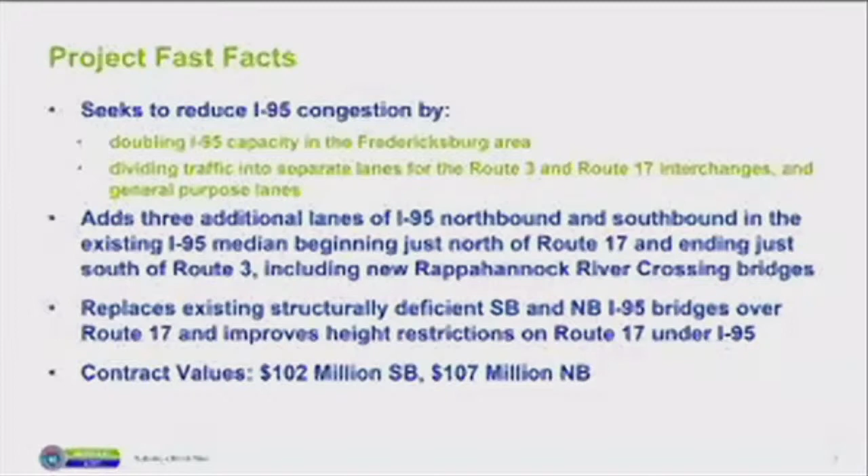the Improved 95 program associated with the Fast Lane grants and the Atlantic Gateway. Additionally, we're going to have some important milestones, including completing the Route 17 interchange and completing the signature bridges over the Rappahannock River. So by fall of this year, you should see the superstructure in place on the southbound I-95 Rappahannock Bridge. And right now, we're already beginning substructure construction by flipping our causeway and beginning some of the other work to work on the northbound bridge.

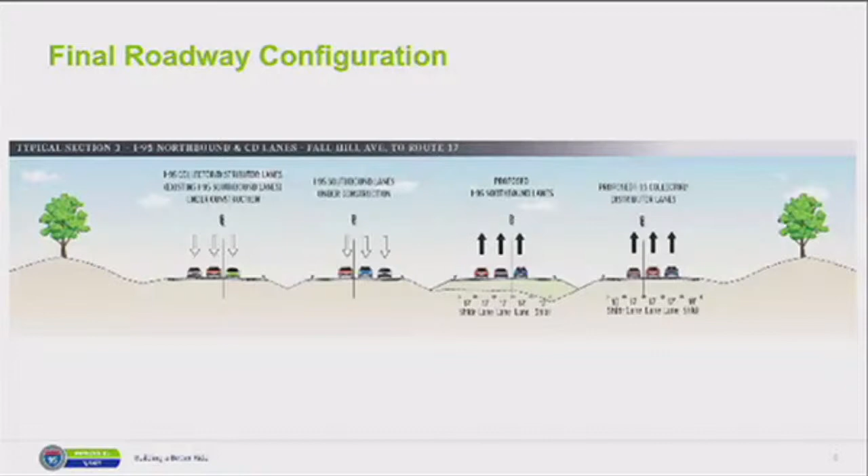Here you can see our final roadway configuration. You'll notice that we're building essentially 6 new lanes, 3 in each direction, in the median of existing 95 between 130 and 133. This presents some very unique constructability challenges that really come home when we get down to the Rappahannock River and have to build these 2 bridges to carry those lanes in the median. Here you can see the existing bridges that were built with the original I-95 and subsequently widened, carrying the existing GP lane traffic. These will become the future CD lane bridges when the through lanes open in the median.

The existing southbound bridge is a 10-span structure, about 1,298 feet long. The northbound bridge is 8 spans and about 1,083 feet long. The concrete substructure units are reinforced concrete, and the superstructure are simple span painted structural steel plate girders.

When we started looking at the proposed bridges within the median, the first thing we did was set the interior span lengths, keeping 3 things in mind: avoiding the historic resources on the south side, the Rappahannock Canal and lock system, maintaining the channel in the river on the north side, and minimizing the number of piers. So what we decided to do was set our new Pier 1 right in line with existing southbound Pier 1, then skip every other pier, resulting in 270-foot span lengths, for a total bridge, a 5-span structure, 1,200 feet long.

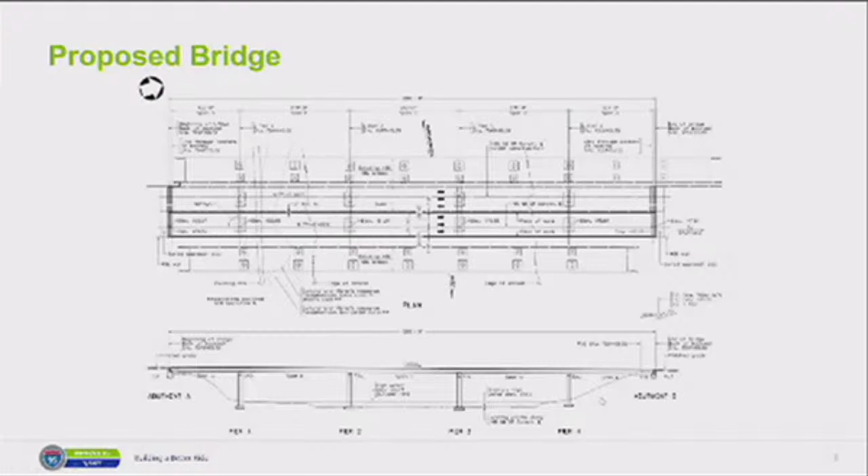As Robert mentioned, the transverse section accommodates 3 new 12-foot travel lanes and 12-foot shoulders. We're using 42-inch high concrete parapets, meeting the test level 5 criteria. Based on the span lengths, continuous structural steel plate girders were the chosen superstructure alternate, and we maximized the girder spacing out at 11 foot 4 inches.

During preliminary design, we evaluated hybrid girders using 70 KSI steel in the flanges, and we also evaluated haunched girders. But working with Wagman and the fabricator, neither of those options were as economical as what we ended up with: a conventional grade 50 weathering steel system.

One of the big hurdles we had to overcome was the development of a proprietary temporary bridge system that we could rapidly remove and reset. It could handle the loads of a 400-ton crane and had a low enough profile to allow the maximum amount of water underneath of our 50-foot openings. A key here is we had to remove bridge number 3 during the peak recreational season for the river.

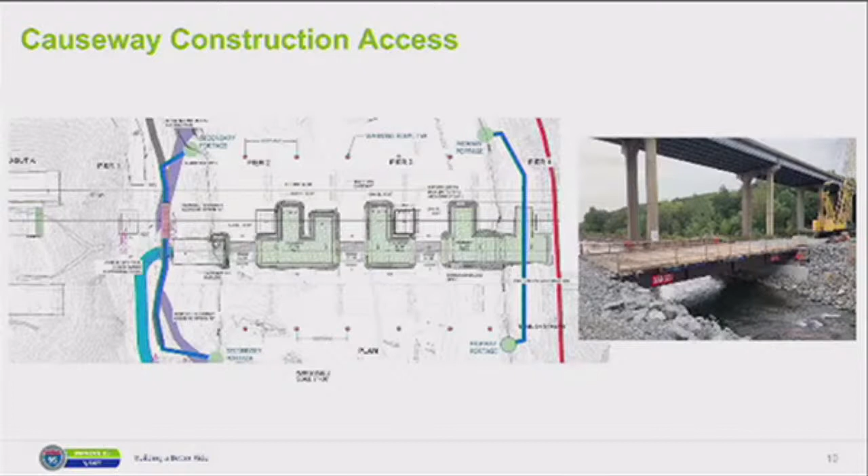One of the key aspects of this job was working in and around the pedestrians and river users. We worked with several groups, including the Friends of the Rappahannock and the Fredericksburg Trail Alliance, to maintain access to the river and the trails on either side during construction. Bridge 3 was taken out of place during peak river season so users had free access, and when Bridge 3 was in place, we installed temporary portages for river users to avoid the dangers of going under that bridge.

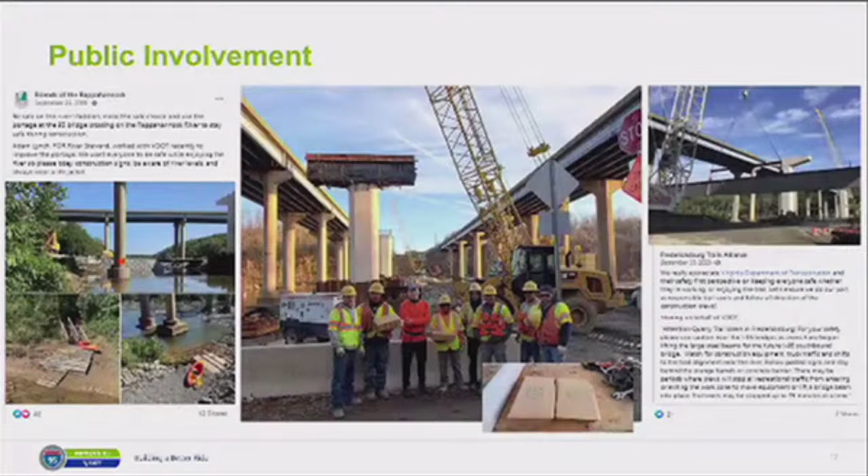Abutment B on the north side is also a Virginia alternate abutment, but it's founded on steel H-piles. Rock in that area varied fairly significantly, and using steel H-piles in pre-drilled holes was the best solution. That abutment is located close to the last pier on the northern end of the existing southbound bridge, and because of that it's a little bit higher than abutment A, making MSE walls for the abutment and wing walls a very economical solution there.

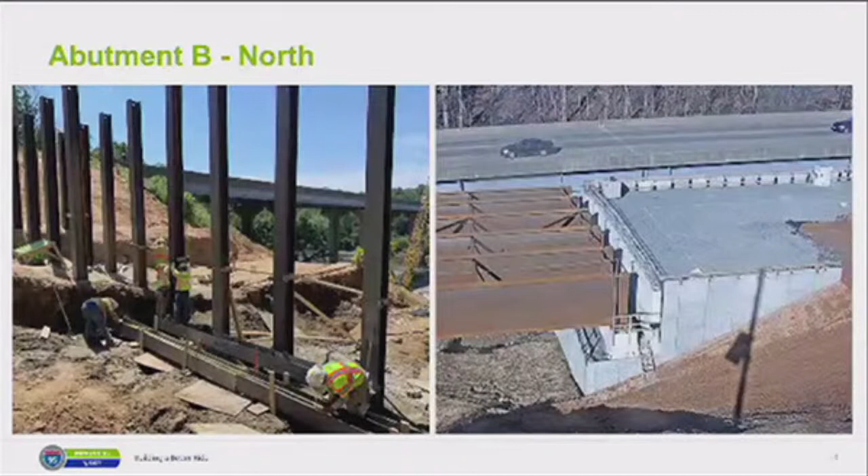The piers have hammerhead caps and columns with rounded ends. The pier height from the top of the cap to the bottom of the footing for the river piers is approximately 92 feet, or a little over 9 stories. All piers are founded on rock, either granite or gneiss.

You could say that rock looks real nice, Tripp.

One challenge during project pursuit was determining how we could get into the river to obtain borings for those river piers, doing it within time-of-year restrictions established by environmental agencies, getting an environmental permit to do that work, and doing it within the scope validation period identified in the RFP documents. We did have existing information from the as-built plans and limited borings that VDOT provided us.

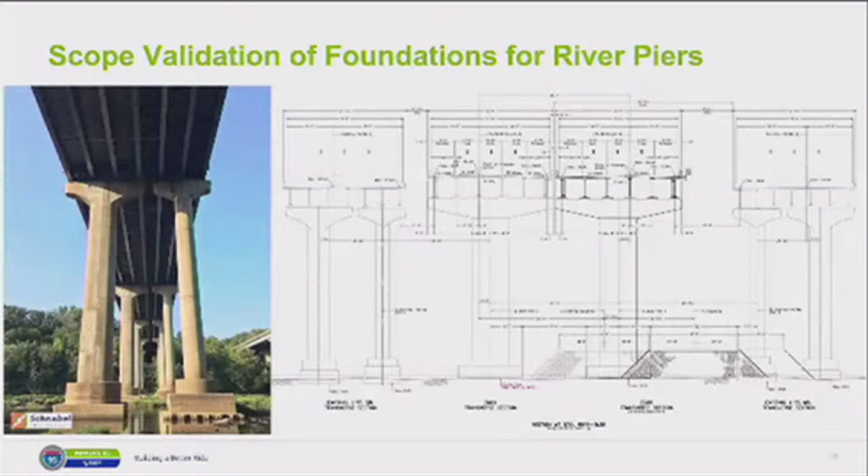So here you can see some pictures to emphasize the importance of this overall waiver of the scope validation, and the potential gains to the project delivery schedule and potential reductions in the price proposal from not having to do these preliminary river borings.

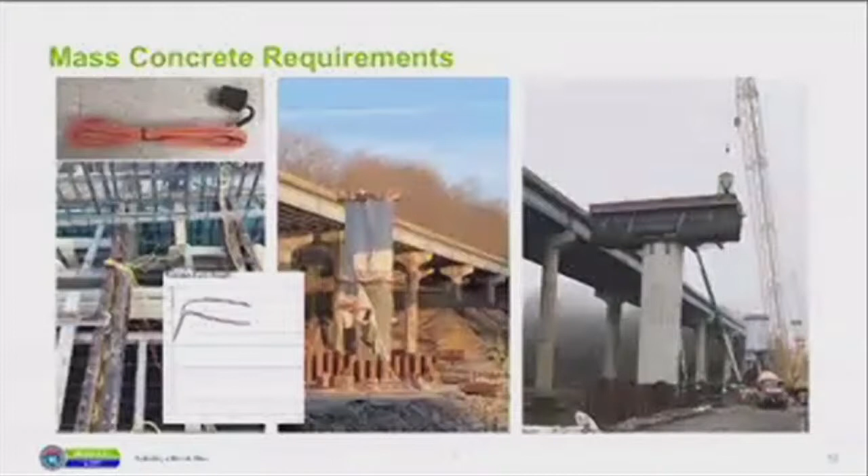During our proprietary meetings with VDOT, as Jerry said, we did a lot of legwork to determine that it was feasible to inspect these bridges down the road. We found a local provider of that inspection equipment, and the snooper that we identified had no challenges reaching under that bridge, both for the southbound and the northbound. And one thing that type of equipment did was allow those inspections to occur from the right-hand shoulder, providing a much safer inspection procedure in the future.

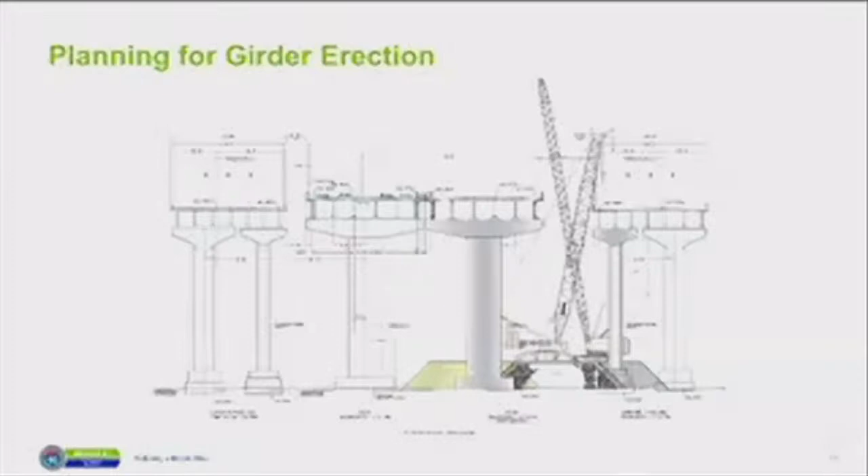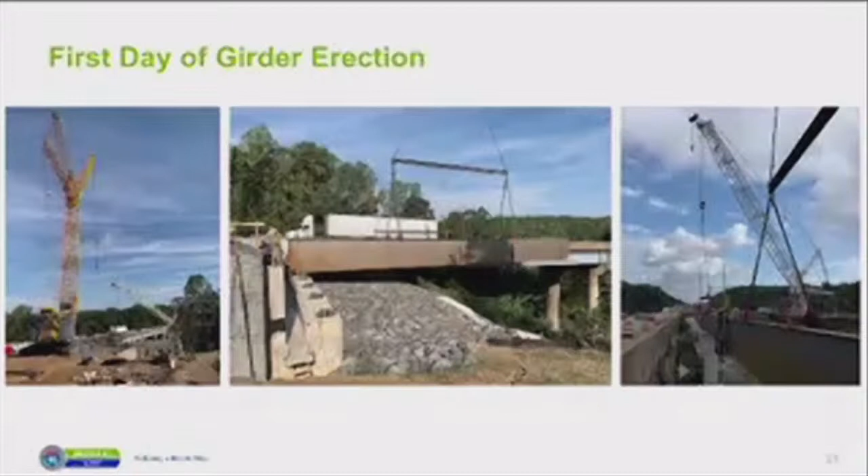So we've done the planning as Jerry described, the design process both from the engineer and the erector. We've built the access causeway, and we've got our cranes on site to help us do the erection. But when it comes down to it, it's the individual iron workers who perform the erection.

Looking at the left-hand photo, you'll see the iron workers in their cage waiting on the girder as it comes from the right from the crane. Then that iron worker in the middle picture grabbing that piece of girder with the spud wrench, and that's what really puts it all together. And then on the right, they've pulled it home and started to put the splice bolts in to complete that segment erection.

The girder erection progressed about 1 span each week, but a couple things occurred during erection. One, we did revise our erection plan to incorporate lessons learned and to make sure we had the safest operation as we did that work.

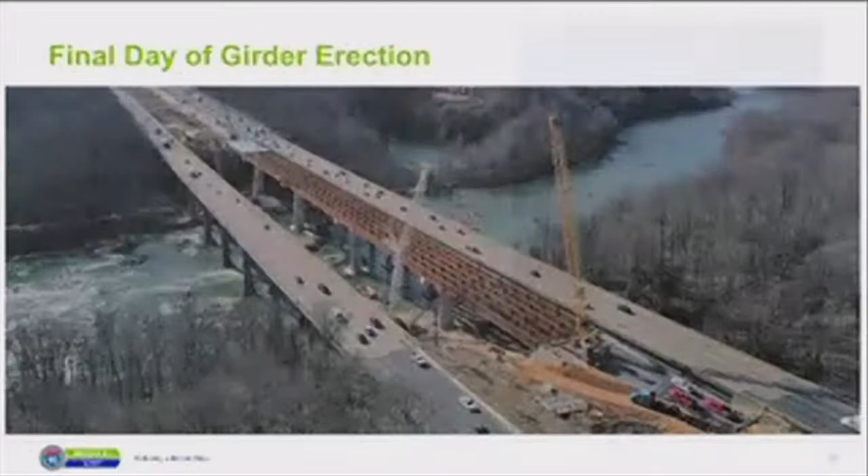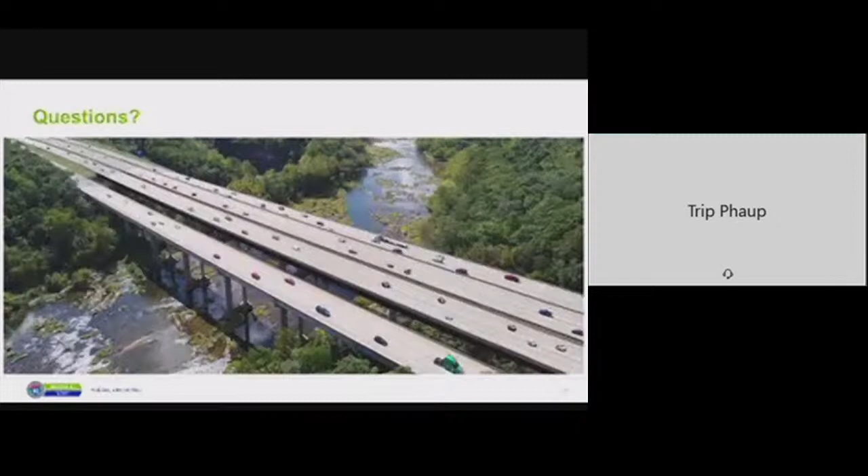Yeah, this is Trip, and I'll respond a little bit more to Junyi's question about the issues with the abutment. There were no real issues with the design of the abutment. It went pretty smoothly following VDOT standard detailing practices.

Really, the challenges related to the varying geology at each abutment. At one abutment we had really good rock, so setting on a spread footing was very reasonable. At abutment B, the geology was a little different, with the rock dipping away, kind of transverse to the bridge, so short piles on one end, longer ones at the other.

Making sure we had that abutment footing set where we wanted was a challenge. The other challenge was that construction of the southbound bridge occurred first, and we weren't sure if we'd win the northbound project, so it was detailed as a standalone abutment. But when we won northbound, we quickly had to figure out how to retrofit the southbound abutment so the northbound abutment could tie right into it. We did think about it during southbound design, but putting it in place was a bit of a challenge. Everything seemed to work out pretty good.

I think the reason they have to be tied together is that, as we're still kind of dealing with, there are significant drainage concerns regarding maintenance access for the trough in the abutment, because this bridge is large enough that the trough could facilitate critters and other things getting in there. We've had a lot of discussions about how to prevent that and keep it accessible for maintenance purposes, keeping that trough clear. On top of that, a lot of detailing and coordination between the structural and roadway teams to work out the drainage scenario around that abutment, because we're sitting on that hard slope of the Rappahannock River Gorge, so you have very limited paths for that drainage. You're not looking at sheet flows over there for sure.

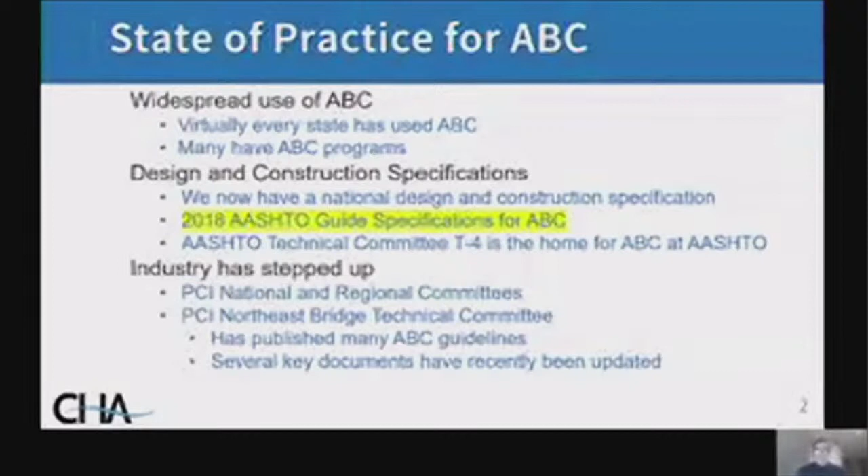Industry has stepped up. Many industries, the steel industry and the precast industry, have stepped up. PCI National, and I'll be speaking quite a bit today about the PCI Northeast Bridge Tech Committee, which is a committee comprised primarily of DOTs, 7 DOTs in the Northeast, plus producers and some consultants. I've been a member of this committee for 30 years, and we've published many ABC guidelines that are available for free download.

Here's a listing of some of those guidelines, both national and the Northeast documents. The Northeast documents can be downloaded at www.pcine.org. As you can see, there's a whole bunch of guidelines here that are all applicable to ABC, and they're very useful documents.

Federal Highway also has 3 very good documents on their site. You can search FHWA ABC, and you'll find their site where you can download these documents for free. The first bulleted item here is a general ABC, basically ABC cover to cover manual. The second document is really a design manual, engineering, design, and fabrication and erection of PBES. And the last one is construction and contracting of ABC, which is useful for managing a construction project.

Other great references that are available, NCHRP Project 12-98 developed 2 guidelines with respect to ABC. The first is a guideline on tolerances, where we specify recommendations for specifications for tolerances for elements, tolerances for erection of elements, and most importantly, tolerances for joints between elements, which is used to accommodate tolerances. If you want a job to come out correctly, this is an important guide to follow.

Also, guidelines for dynamic effects of bridge systems. We have found that moving bridges on SPMTs causes significant dynamic effects on the false work, the SPMTs, and even the bridge. So research was done to develop design guidelines for dynamics. Both of these documents are referenced in the guide specifications, so they're worth downloading. They are available for free.

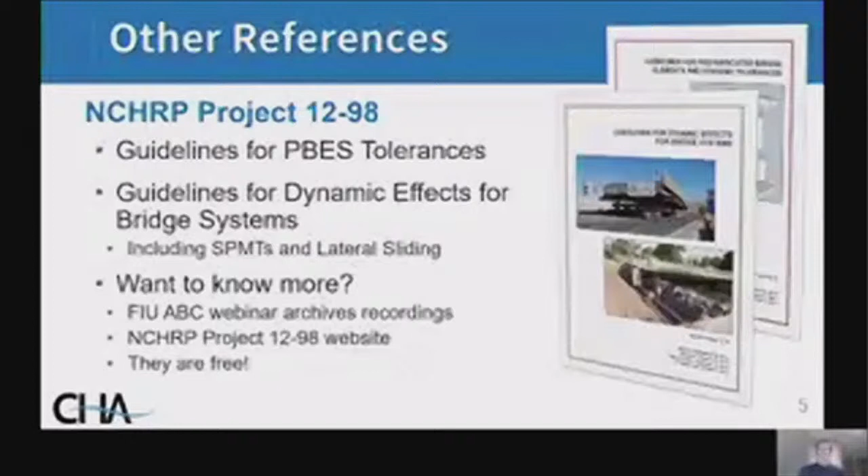You can search NCHRP Project 12-98 website. You can download the documents. You can also download the report that led to those documents. If you want more information, you could actually go to FIU ABC UTC website, and there are webinar archives for 2 presentations that were given on both of these documents. Again, they are all free for download.

So let's dive into the guide spec and see what it contains. The first 5 sections of the guide spec are design provisions. I'll talk a little bit of more detail in the next few slides. The last 7 sections are construction specifications. Due to the brevity of today's presentation, I can't get too deep into those, but they are available, and they are full AASHTO format construction specifications for all these items.

Let's dive a little deeper into the first 5 sections. Section 1 is an introductory section. It includes definitions, and you might think that's boring, but it's important that we have common terminology that we use. For instance, the gap between elements, we refer to those as joints, closure joints. Sometimes people refer to them as closure pours because we're pouring concrete or UHPC into the joint, but AASHTO has made a decision to use the term closure joints. That's just an example of some of the definitions that we have.

Section 2 has general design provisions outlining responsibilities for the contractor and the engineer. Shipping and handling provisions are listed, which is important to know, as it's commonly misunderstood that shipping and handling lifting calculations are the responsibility of the fabricator, not the engineer. This is contractor means and methods. But we do have provisions that you can specify for the contractor or the fabricator to follow.

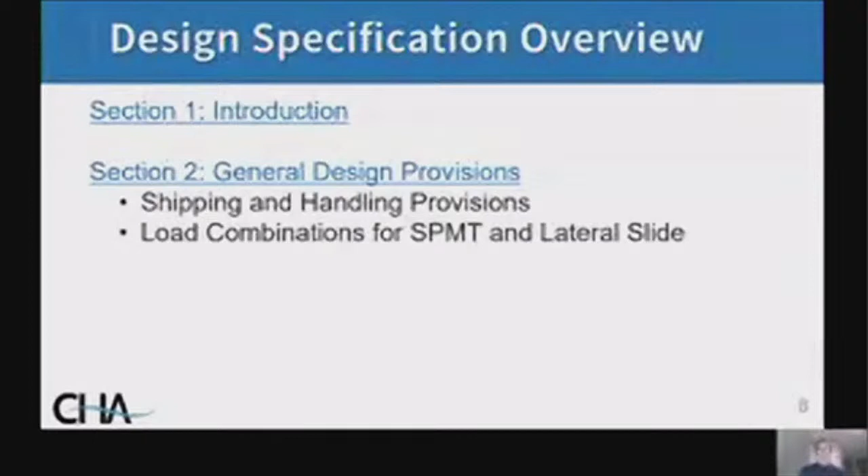We have load combinations for design of prefabricated elements, but also load combinations have been developed for SPMT and lateral slide bridge moves. This includes dynamics that I mentioned before.

Section 3 is the major design section in the document. The key thing is the majority of the specifications are based on emulation, meaning we're emulating cast-in-place construction with precast. The key about emulative design is that if you use emulation, your design of the structure as a whole can be based on cast-in-place construction. So analyzing a pier, analyzing abutments, walls, all that can be done using standard AASHTO provisions. There are significant seismic provisions in this section.

There are also several provisions not covered in the AASHTO LRFD bridge design specs. For example, the bridge design specs include provisions for development of hooked bars, but there are no provisions for lapping of hooked bars, which is a common ABC detail. The guide spec contains those provisions.

UHPC is very popular. We have provisions for design and construction specs for that. Mechanical connectors - the current AASHTO bridge design specification has mechanical connectors for reinforcing. The basis of that is the connector needs to develop 125% of the specified yield strength of the bar. ACI has a second level, type 2 mechanical connectors, which can develop 100% of the specified tensile strength, which is a higher level. For a grade 60 bar, that's 150% of FY. So we do recommend using mechanical connectors type 2 for critical connections.

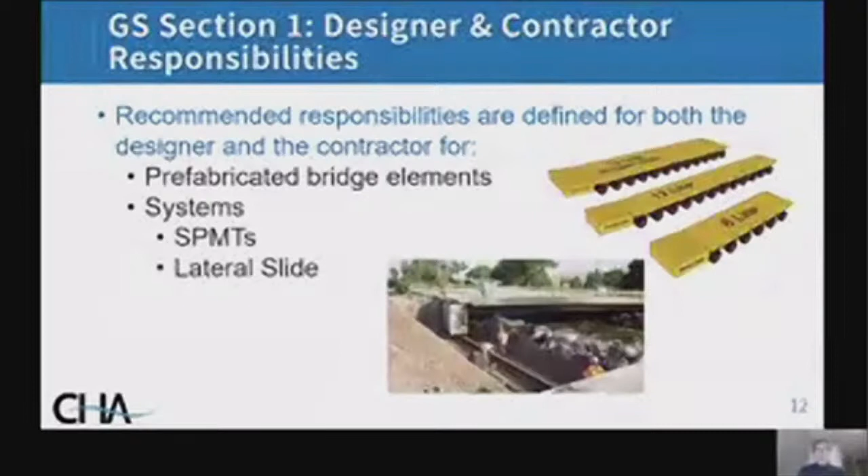Load combinations are included in Guide Spec Section 2. This is simply stating that if you're using an emulative design process, you essentially design the structure according to the AASHTO LRFD bridge design specifications.

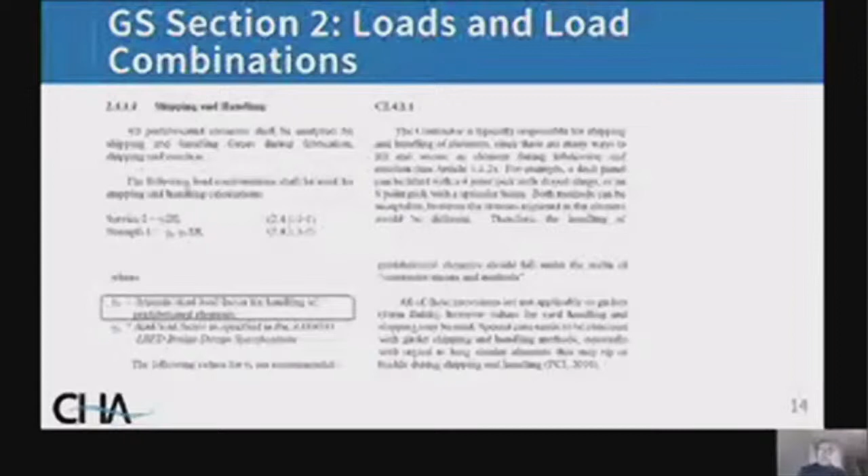As I mentioned, we have provisions for shipping and handling. We recommend that engineers specify these provisions for the contractor to follow. These are based on work done at PCI. Essentially, we use dynamic load modifiers to increase the dead load to account for dynamics. This table shows the modifiers that are used in the PCI documents.

Essentially, things that engineers typically don't think about - there's significant force effects when you remove a precast piece from the form due to form suction and adherence of the piece to the form. This is often the controlling load case when checking an element for lifting and handling, because at this time, typically the concrete strength is not at its full strength, it's at its initial strength.

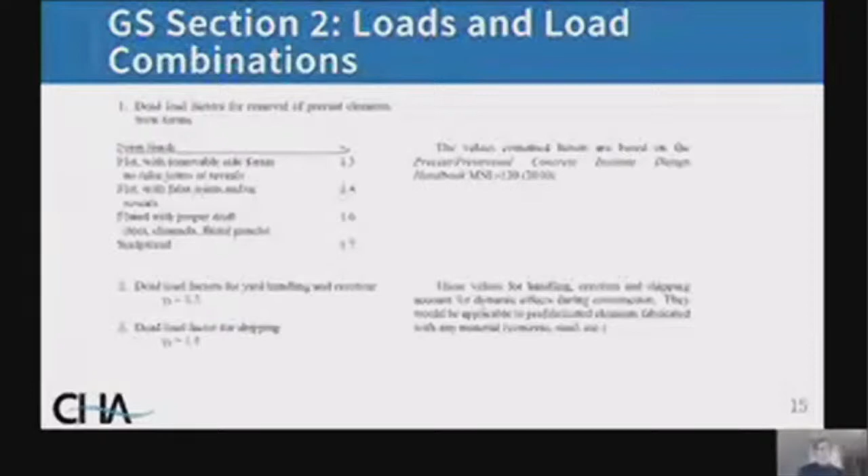Again, this is the realm of the contractor's means and methods, but we want the engineers to know the correct process to follow for this. The PCI MNL 120 document is listed on the right in the commentary. That document does include examples for how to calculate lifting and handling calculations. We recommend that designers specify that document as a requirement.

Section 3 is the largest section in the guide spec at 85 pages. It includes all the design provisions, including seismic provisions, which we're not going to cover in much detail today. We just don't have time to cover all the provisions, but we'll breeze over a few of them just to give you a flavor for what's in the spec.

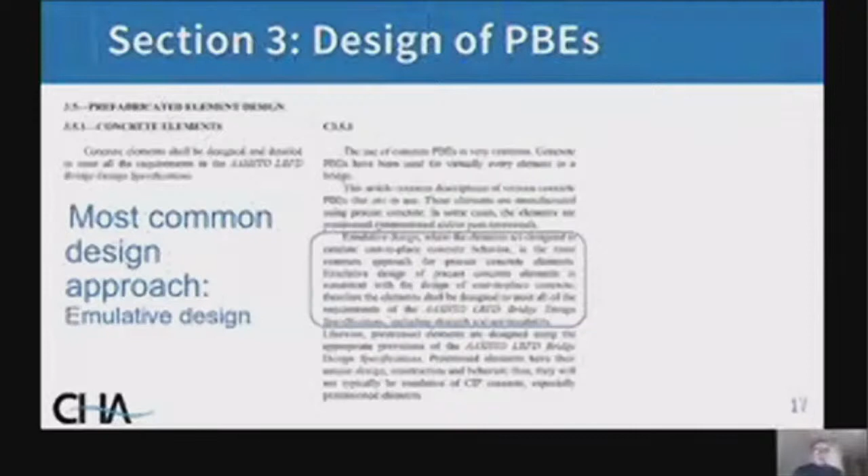As far as design of PBEs, Section 3 covers the design, and this is where we say that you need to design according to the AASHTO LRFD bridge design specifications and use an emulative design approach.

As far as connections go, they're very important in prefabricated and precast elements. The most common connections are covered, the ones that we see across the country. The term we use for these closure joints is cast-in-place closure joints using lapped bar reinforcement.

This covers straight bars, lapped headed bars, lapped hooked bars, and lap bars with UHPC. These are all covered in the spec. We also cover mechanical connectors, the Type 1 and Type 2 connectors mentioned before. Bars inserted in grouted post-tensioning ducts are a version of a mechanical connector. We also cover pocket connections and socket connections.

There's some confusion in the market about what a pocket connection is versus a socket. The best way to describe it is shown on the next slide with nice graphics. A pocket connection, shown on the left, is where reinforcing from one element is passed into a void in the second element that is filled with a material, usually concrete.

A socket connection is where a portion of an element is inserted within the adjacent element. There are two details shown on the right. The top one is a column set into a footing that's cast in place - that's a socket connection. The bottom detail is a column inserted into a void in, say, a pier cap, which is also a socket connection. The best way to remember a socket connection is to think of a light bulb that you screw into a light socket - that's the best analogy I have. If you understand that, then everything else is a pocket connection.

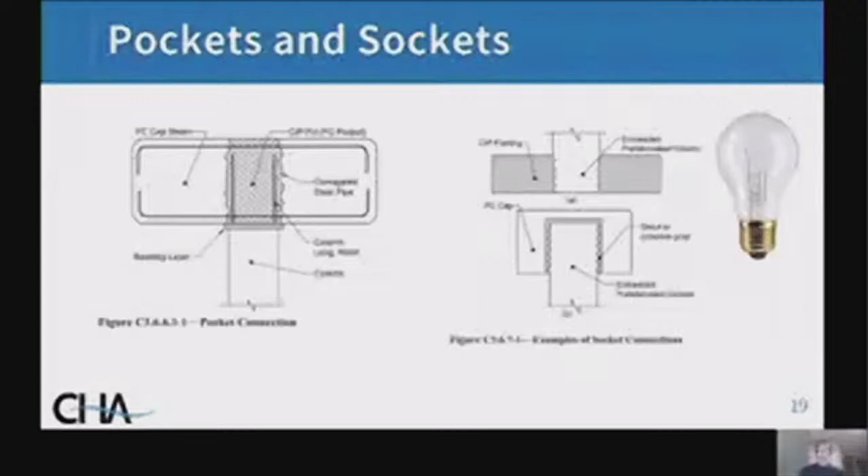Let's show some of my favorite pocket connections. This is an integral abutment detail where we use corrugated metal pipes cast into precast pieces, set over piles, and the void is then filled with concrete to complete the connection. Very simple detail, very simple connection, easy to execute in the field. The key thing is what is the resistance of that pile for punching through the void, so we've developed an equation for the punching shear based on AASHTO provisions for interface shear.

Section 3 covers grouted couplers. I mentioned this before - the grouted couplers essentially are a mechanical device made of cast steel that transfers force from one bar to the next.

In the diagram on the right, the couplers can be located at the base of a column, inverted at the top of the footing, or inside the cap as well. You can connect walls, piers, anything with these couplers. The photo in the center shows a pier cap being installed in Utah, where you can see the projecting bars from the column and the couplers cast into the cap.

The way we transfer force to these couplers: the lower bar force is transferred via the grout inside the coupler, which is put in after the connection is made. It transfers the force from the bar to the coupler, then the force is transferred from the coupler through the grout to the upper bar, completing the connection.

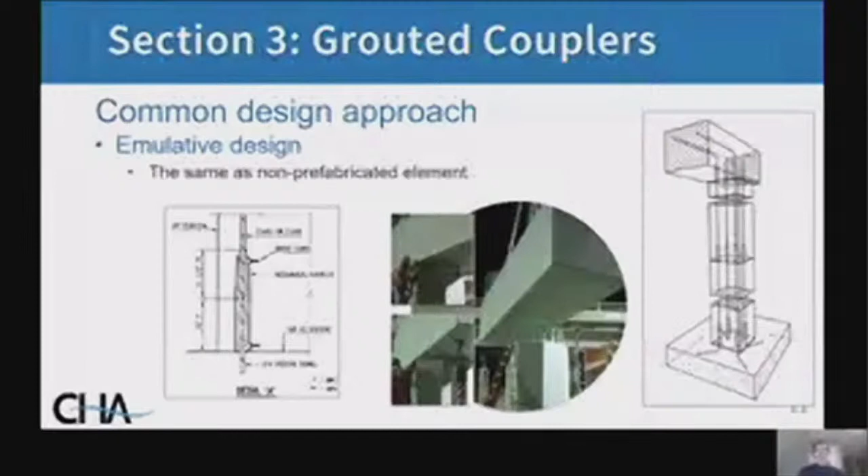Some people are uncomfortable with these connectors, worried about how they'll function. The reality is they're built on the same concept as the lap splice in concrete, where force transfers from one bar to the next via the concrete around the bars. So if you can trust a lap splice to function, you can also trust these couplers to function as well.

Another detail that came out of the PCI Northeast group, one of my favorites, tries to simplify construction of an abutment by using standard wall panels for the lower portion. We recommend using corrugated pipe voids in that piece to reduce the weight of the piece and to use it for connections. That void is filled with concrete in the field.

The key to this detail is having one complex piece - it may be two pieces - on top of the abutment that has things like the steps for beam seats, plus a whole bunch of simple pieces. That's the idea.

The connection is made by putting dowels inside the voids that pass between the wall stem and the cap, and filling that with concrete. Very simple, easy to design, because this joint being just below the beam seat essentially is a low moment demand connection. If you think about it, bridges built with stone masonry abutments have just mortar between the stones, and with a gravity section there's virtually no force going across the joint. So it's a very easy connection to design.

Here's a photo of a bridge built in Kittery, Maine, where the Maine DOT took these details and executed them very well. You can see where they got creative. The footing is shown on the right with dowel bars coming out of the footing in clusters. Those bars line up with the voids in the panel.

The panel is set over the bars. The voids are filled with concrete up to about three-quarters of the height of the wall panel. Then they come back a day later and put dowel bars in the upper portion of the panel, as you can see in the center photo. Then the caps are placed on top and filled with concrete to complete the abutment. Very simple construction, very fast construction. You can see the aesthetics of the abutment is beautiful.

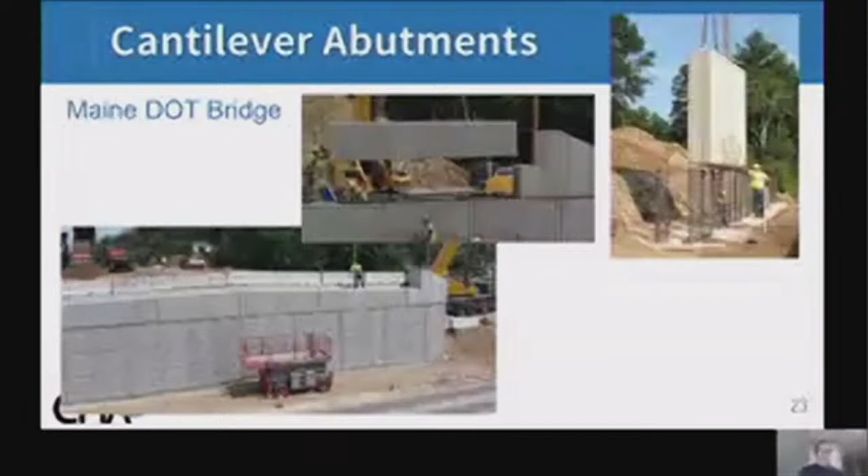Very nice bridge. Another detail I like was developed in Washington State, where essentially they built the bridge upside down. They constructed the column or wall panel before they put the footing in. This is great for pile-supported foundations, and the idea is to have a precast column with temporary support on it, then set that down, a rebar cage is set around that, and you pour the footing. Even though it's cast-in-place construction, it's very fast - probably 2 or 3 days to build a pier.

Taking it to the next level, Washington State studied this detail with a research project funded by Federal Highway, coming up with the idea of having the column set into the cast-in-place footing, but with no reinforcing bars passing between the column and the footing. This is a true socket connection.

The best analogy to this connection is a mortise and tenon joint in woodworking, where one wood piece is inserted into a void in the other piece, giving you a very strong and durable connection. The nice thing is you can tie the rebar cage ahead of time and then set the column in. They're showing the column being installed on the right with the bottom mat of reinforcing in place, but the reality is you could have both mats of reinforcing in place before the column is set.

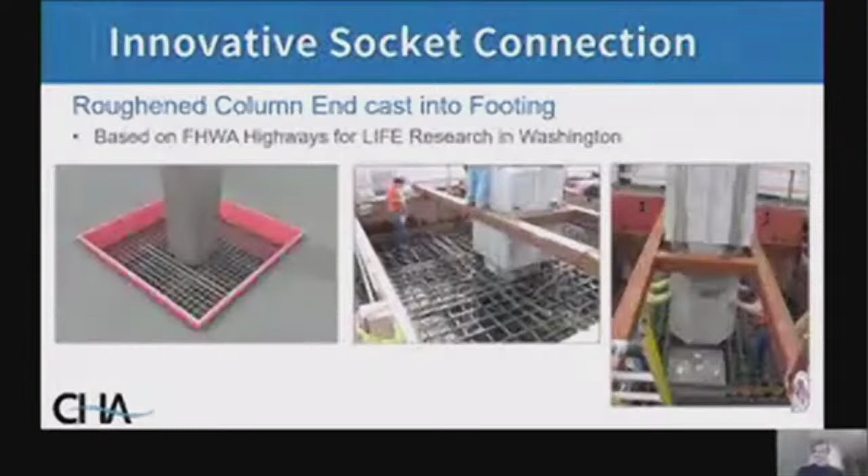Let's go through some graphics showing how this might work. This is a round column. The provisions in the specification allow you to use exposed aggregate as opposed to a formed corrugated end of the column. The reinforcing bars need to be developed in the footing, and without hooks you may need to use headed bars to achieve this, so we're showing that.

As far as footing reinforcing goes, you essentially take the standard footing reinforcement you'd use if it was cast in place and move some bars around. The red bars denote those bars that are shifted, and diagonal bars are added to enhance the connection as well. This is showing a spread footing, a shallow foundation, but it works really well with pile-supported footings too. Once the bars are set, you insert the column on a leveling pad, true it up, and fill the form with concrete. Very simple connection, easy to execute, and very cost-effective.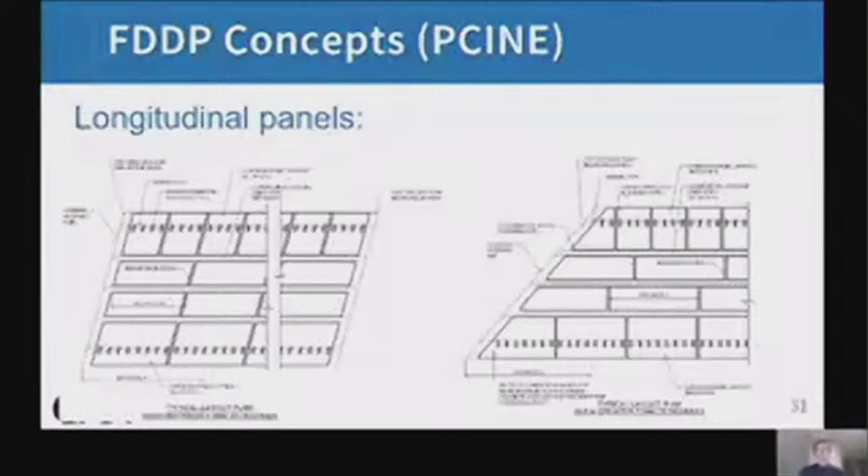Let's look at an example of where this might have been done, in downtown Boston, the Commonwealth Avenue Bridge, a very large, very complex ABC project executed a few years ago. You can see the joints running down where the top flanges are.

Another advantage is if you have steel girders, you can shoot your shear studs anywhere you need to put them without worrying about pockets. If you use a bulb T girder, you can actually use straight bars if the flange is wide enough. If you have a narrow flange, hook bars with concrete or UHPC work very well. These are very simple details, and they simplify the precast panels by eliminating voids. Essentially, they're rectangles with bars projecting from the edges.

Link slabs are really popular for ABC because we can do span-by-span construction and make the bridge jointless, not continuous. That's the key, and really the key to continuity is getting rid of the joints that leak and cause damage. So we have provisions developed for link slabs based on work done by Caner and Zia in 1998.

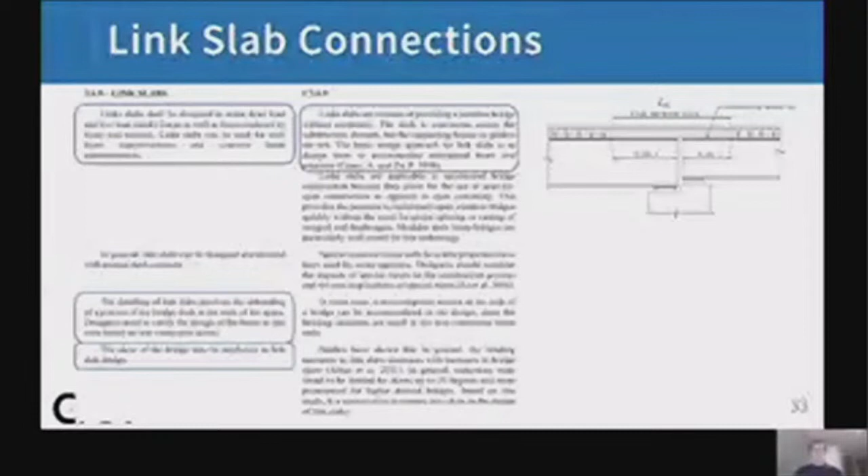I circled one provision that's really important: the skew of the bridge can be neglected in the link slab design. This is because research done in Michigan showed that as skew increases, the actual forces acting on the link slab decrease. It's very interesting that we could ignore skew in link slab design, which is a very common question we get.

PCI Northeast has also developed a beam called the NEXT beam, the Northeast Extreme T. It's a heavy-duty double T, quite a bit more robust than, say, a parking garage double T. There are 3 different versions of the NEXT beam in production, all using the same form, which is nice.

The NEXT F beam is on top, where the top flange is a form used to support a stay-in-place form for an 8-inch reinforced deck. The NEXT E beam has a top flange that is more heavily reinforced. It acts as the bottom mat of reinforcing in the deck, and then a 4-inch reinforced topping is placed to complete the deck.

NEXT D, on the base, is a fully decked section where the top flange of the beam is the deck of the bridge. The NEXT D is probably your best option for ABC, but all three of these are very fast construction because we're eliminating a significant amount of the formwork required for typical conventional construction.

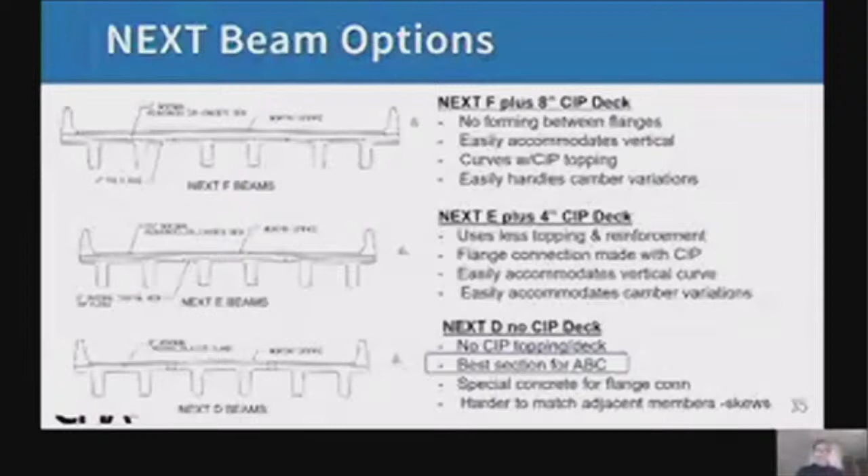Lateral sliding is really popular in the U.S. because it's quick, less expensive than SPMTs, actually faster than many SPMTs, and very versatile. If you have room to build a bridge alongside the existing bridge, I would highly recommend using lateral slide.

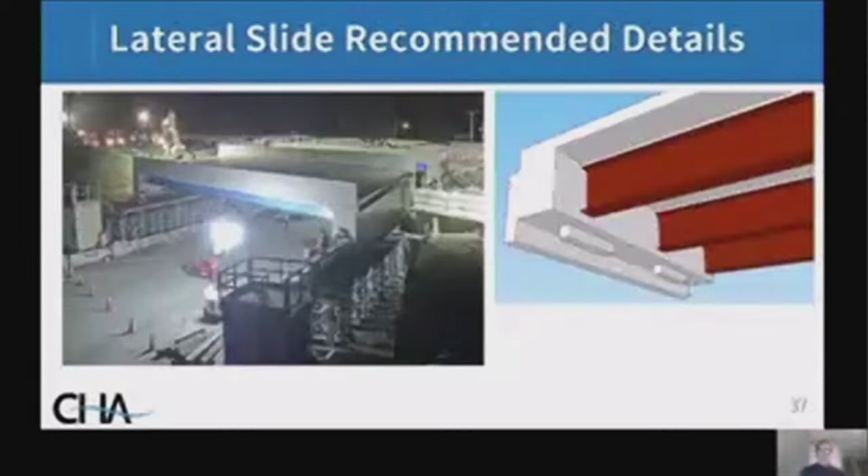The detail on the right was originally developed in Utah, and it's a common detail that works well for any kind of slide system, whether the contractor is using rollers, slide bearings, jacks, or cables. That detail works for everything, which is great because you can give the contractor options for which slide mechanism they want to use. You'll notice that tooth on the back of the semi-integral abutment that projects down below the bridge seat. The next detail will show how that's used.

Essentially, we put a notch in the back of the abutment. This is to prevent water and moisture from getting into the bridge seat when the bridge is completed.

So let's walk through the sequence. We slide the bridge over, in this case on temporary slide bearings. Once the bridge is in position, the bridge is jacked up, placing jacks between these slide shoes. We set the permanent bridge bearings underneath the slide shoes, fill the joint in the back with closed cell foam, and set the bridge down. Very simple, easy details, very durable, and cost effective as well.

GRS IBS is a technology developed by Federal Highway that I love. It's a great ABC product because you can build abutments very quickly. Basically, the best way to describe a GRS IBS abutment is that it's like an elastomeric bearing. When the bridge expands and contracts in thermal movement, the entire abutment flexes with the superstructure.

So there are no bearings on this bridge. There's no approach slab because it's a reinforced backfill that does not require approach slabs. You do not get settlement that you get with normal abutments. The facing is simply either dry cast block or, in this case, wet cast block. It's a bridge in Connecticut we designed a few years ago. It's a beautiful looking bridge, super durable. There are no joints in the bridge and no bearings, so it's a very cost-effective structure.

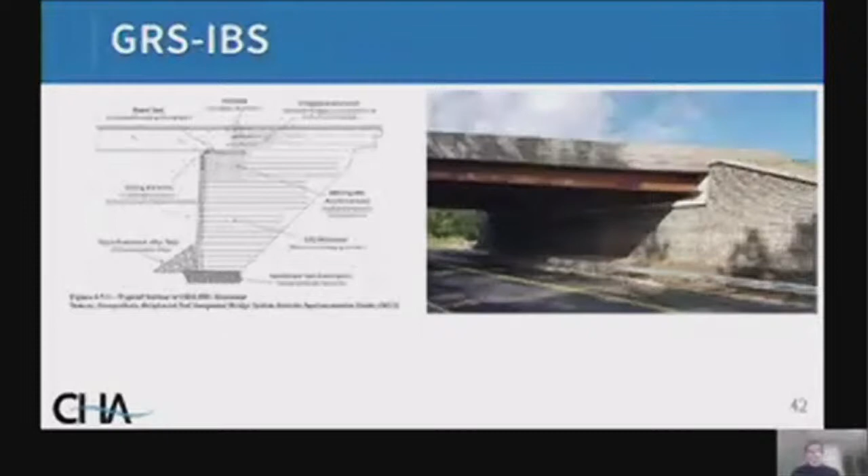So if you have a grade crossing, a lot of people are nervous about using these for river crossings, but if you have a grade crossing, it's a great solution.

We don't have time to go over detailed construction specifications, but the document includes all these specs. The first important bullet is fabrication and assembly planning. If you buy a bicycle for your child, you usually have to assemble it, and there are instructions on how to do that. Well, if you're building a bridge with prefabricated elements, we think it's a good idea for the contractor to develop an assembly plan, a step-by-step process for assembling the structure properly, taking into account materials and schedules. We have very detailed provisions that we recommend engineers use for their specifications.

Quality control for precast concrete, we've enhanced what's in the AASHTO LRFD bridge construction specifications. Repair of elements is an important aspect. When moving elements, damage may inevitably occur, and we need to know how to fix that and manage it. Lastly, material specifications for common ABC materials, high early strength concrete, ultra high performance concrete, and non-shrink grout. We've developed performance specifications for all three of these, a lot based on work done by Federal Highway.

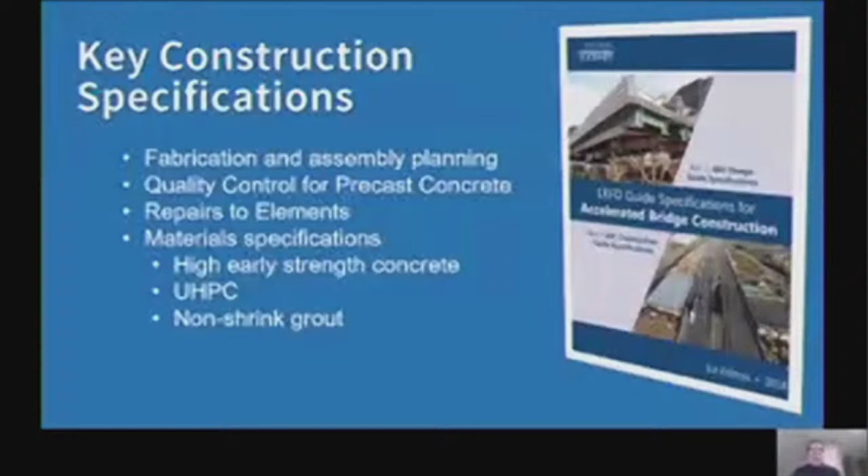So in conclusion, we have a specification. ABC is here to stay. There's really no reason why one should shy away from an ABC project. This is a national specification published by AASHTO. It covers everything you need for design, including loads and load factors, element design, connection design, tolerances, dynamics, SPMT lateral slide systems, and full construction specifications. So you have all the tools you need to design and specify an ABC project now. I encourage everyone to go out and build something fast, which is the purpose of ABC. I thank you for your time today, and I look forward to answering any questions after this presentation.

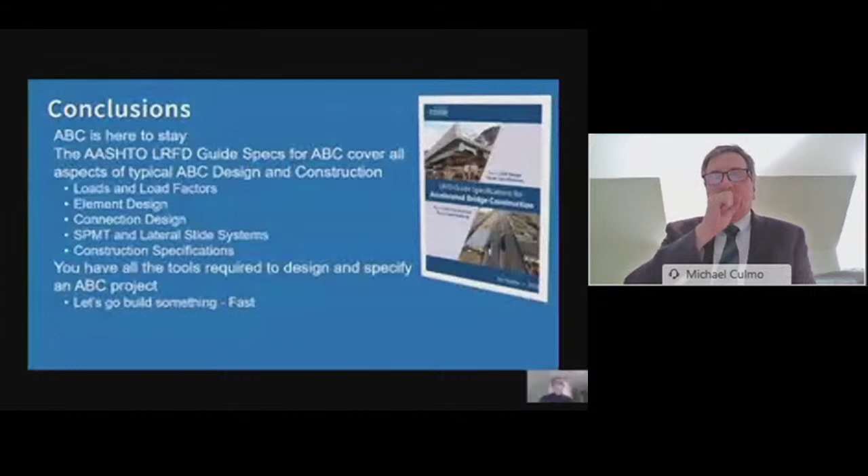All right, Mike, thank you so much. That's a great presentation. Even a pavement materials guy like me felt like I kind of understood what's going on.

So that's awesome. We did get a question in the chat, which may be too detailed to answer in the few minutes we have left. But if we use roughened precast columns and a socket connection, do we still check for punching shear in the footing? And if we do, how do we go about it? Can you address that?

Yeah, I can address that. Thank you very much, I appreciate the question. It's a good question. The research that led to that detail, they tried to fail the connection in punching shear. They actually had a hard time doing that because the capacity was so large. The reality is, as long as you meet the provisions in the guide spec regarding the thickness of the footing being at least 1.1 times the diameter of the column, it will not fail in punching shear. I guess in theory you could check a traditional cone failure, punching shear failure. You would do it just as if it was cast in place.

You use the same provisions for that. As far as the corrugated column punching through the footing, research showed that as long as you meet the provisions in the spec for roughening the surface, you're good to go. There are provisions in the spec to check interface shear between the column and the cast-in-place footing, which is essentially a punching shear failure as well. There are recommendations for cohesion and friction factors using the AASHTO LRFD bridge design specification requirements. So the answer is yes, you do check punching shear, and we have provisions to cover that for you.

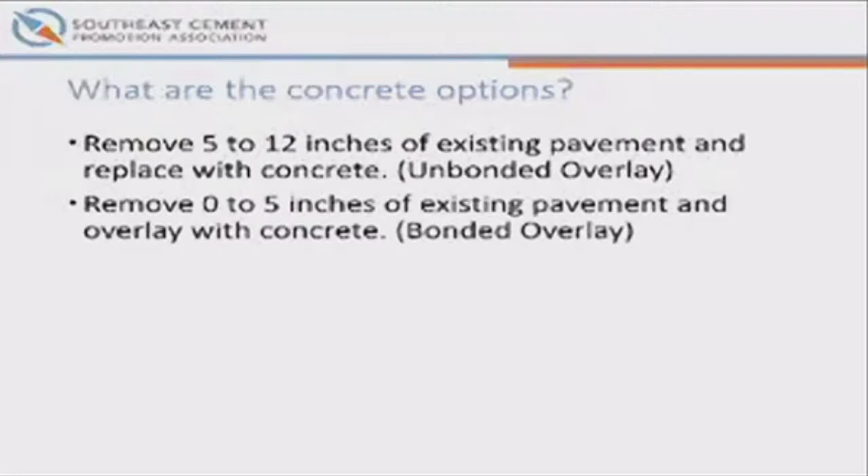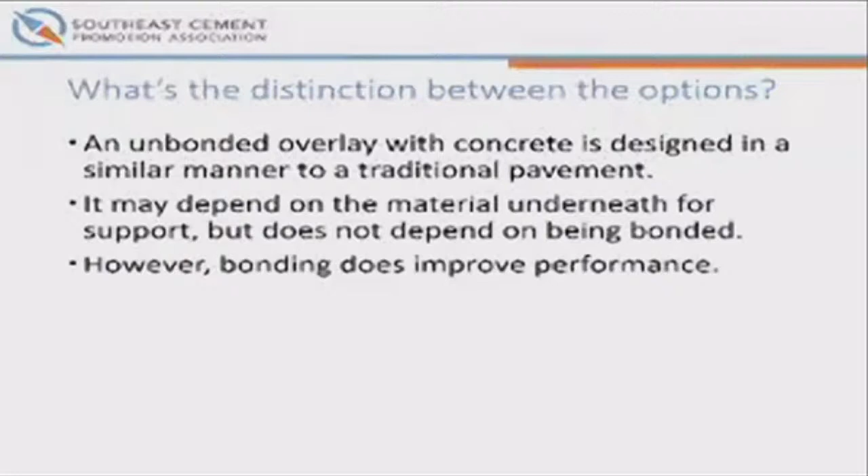Now, asphalt pavement design principles: asphalt pavements are flexible, they follow what's underneath, so the distribution of loads depends largely on pavement thickness. Here we have a 10 to 14 inch pavement, and that same 100 psi load goes down at about a 45-degree angle, resulting in a depression basin of about 2 to 3 times the thickness of the pavement. So we're somewhere between 30 and 42 inches, whereas before we were 15 to 20 feet. That causes contact pressure on the subgrade to be much higher—it can exceed 20 psi—much more concentrated, and deflections are higher. Here, subgrade strength or stiffness is very important, because otherwise, if it's not strong enough, it will cause depressions in the new pavement.

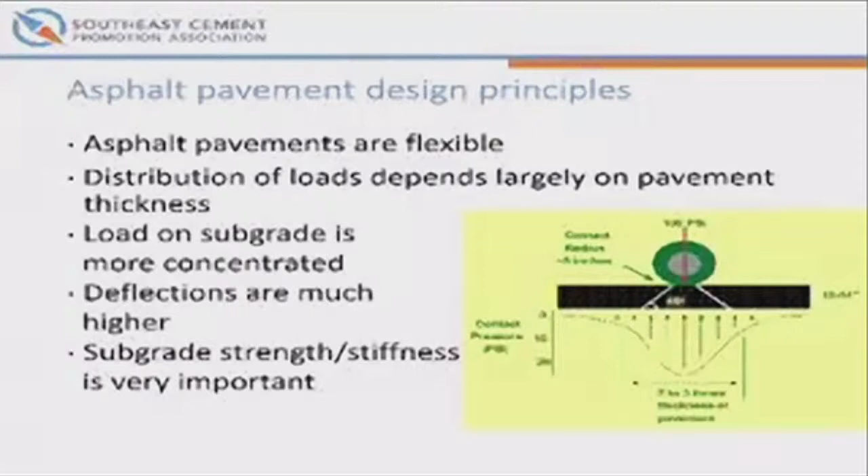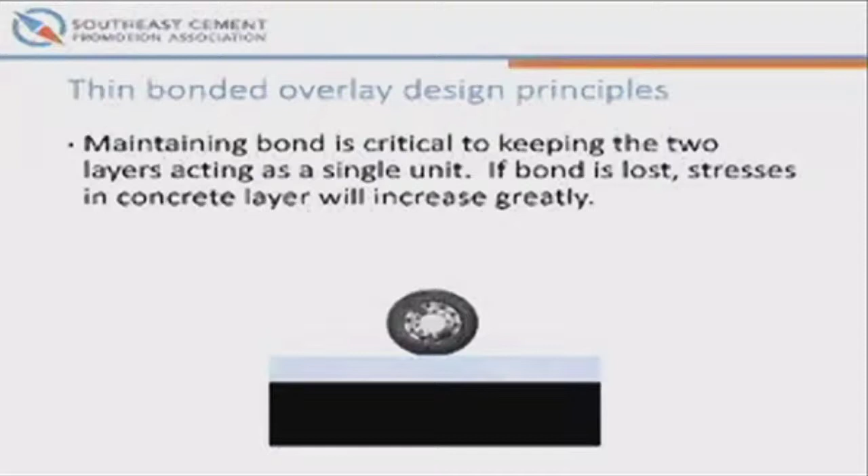So if you're doing a thin bonded overlay, what design principles guide us? If asphalt surfaces are unable to resist traffic braking or accelerating forces, especially at intersections—this is usually where this happens—then you can go to a hybrid structure sufficient to carry the traffic loads. Maintaining that bond is crucial to keep the two layers acting as a single unit; it has to act monolithically, just like when doing multiple lifts of an asphalt pavement—you have to bond them. If the bond is lost, the stresses in that concrete layer will increase greatly, which is not desirable.

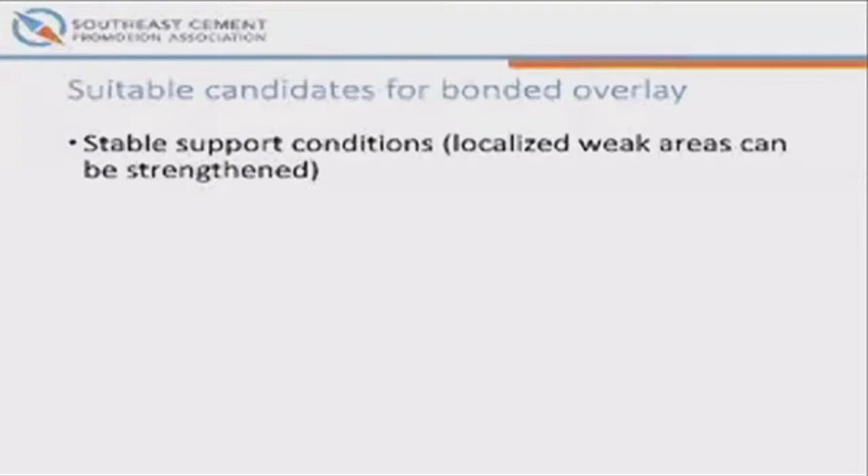So what are some suitable candidates for bonded overlays? What are we going to look for? Like we talked about, we need stable support conditions. If you have localized weak areas, you can strengthen those. That's probably going to happen when you have an intersection that's been widened or had turn lanes added, or multiple iterations of that. If you have surface distresses, rutting and shoving of the surface layer but not deep in the pavement, you'll need to do some investigation to discover where the rutting is coming from.

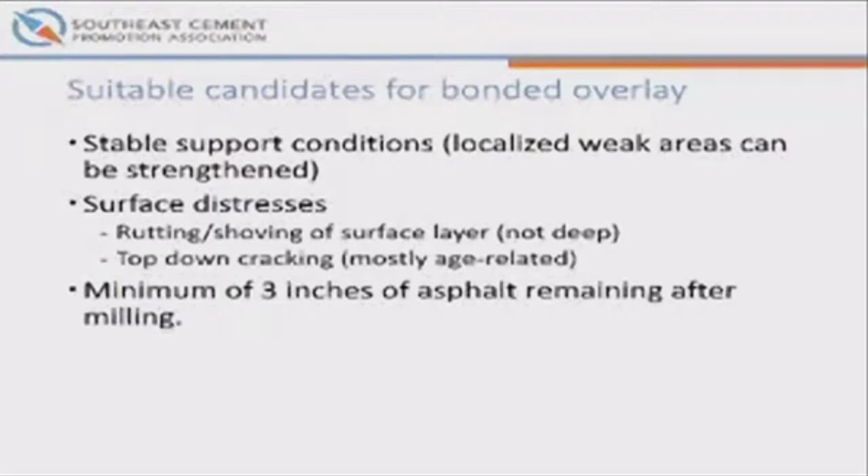If there are deep ruts present, you need to find out if that's in your asphalt layers or in your subgrade. If you have top-down cracking, this is mostly age-related and not an issue deeper in the pavement. You need a minimum of 3 inches of asphalt remaining after milling, because otherwise you won't have enough to work monolithically with that bonded layer.

Now, what are some poor candidates for a bonded overlay? If you have significant structural deterioration, high-severity fatigue cracking, rutting of the base and subgrade, these are not good candidates. That pavement has already reached its useful life, and this would be a good candidate for a thicker, full-depth replacement with concrete, or even if you did leave some asphalt behind, it would be an unbonded overlay, because no strength would be contributed by that underneath layer.

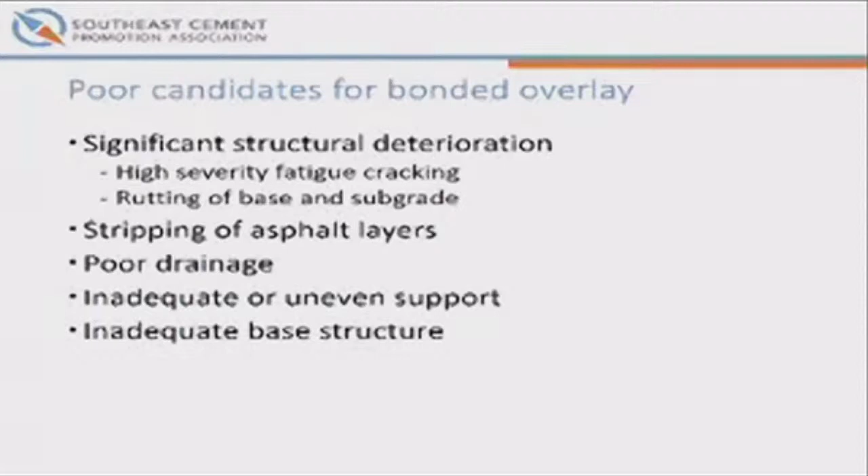If you have stripping of the asphalt layers, that's going to cause those layers not to act monolithically. If the stone in those layers has had the asphalt stripped off by water intrusion, that's going to be an issue. Or if you have poor drainage, that needs to be addressed before you do any kind of overlay, especially if you have inadequate or uneven support. You need to know what's going on underneath the pavement. If you have inadequate base structure, you're not going to want to put something else on top of it. You really just can't bridge with a bonded overlay. You need a good support structure.

So how do we decide how thick to make our bonded overlay? There are several methods available. There's a website called pavementdesigner.org that has options for designing a bonded overlay. There's also a bonded concrete on asphalt mechanistic empirical method developed by the University of Pittsburgh under a pooled funds study. Both of these options are free. They're web driven. You can go right to pavementdesigner.org, or search for BCOA concrete asphalt and it will lead you to the University of Pittsburgh version.

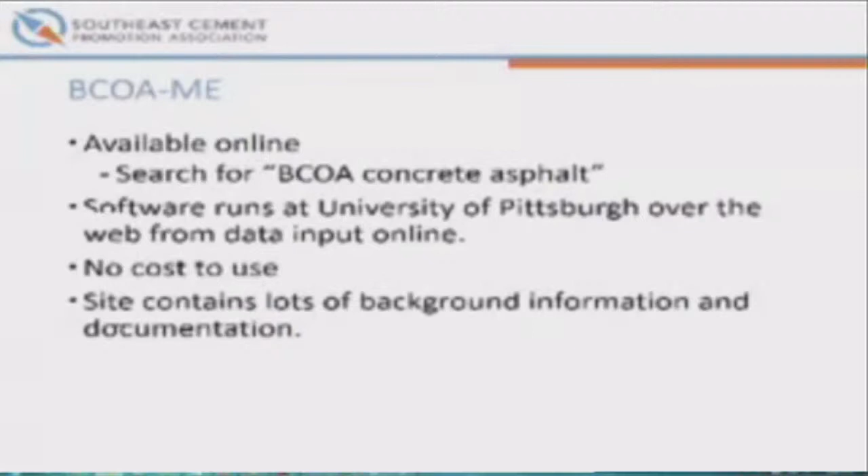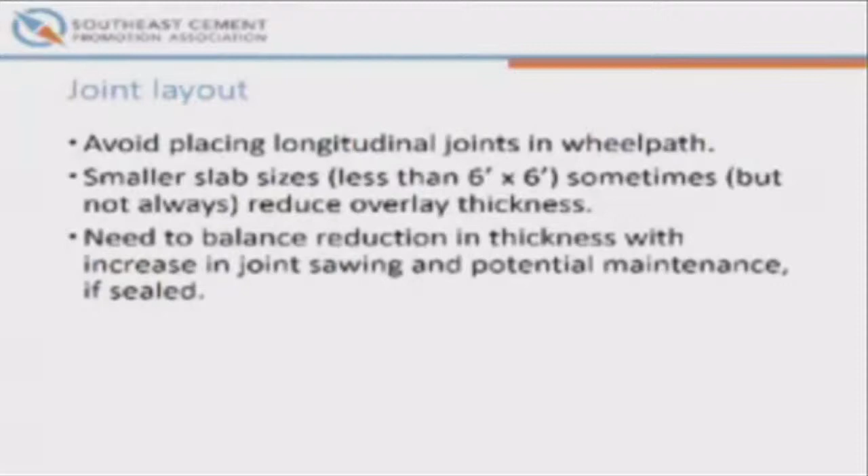Sometimes using a smaller slab size, less than 6 feet by 6 feet, can reduce your overlay thickness, but you need to balance that reduction in thickness with the need to increase your joint sawing. If you go thinner than 6 inches, you're probably going to need to go down to, say, for a 4-inch overlay, 4 foot by 4 foot panels, so you need to look at those costs and balance that.

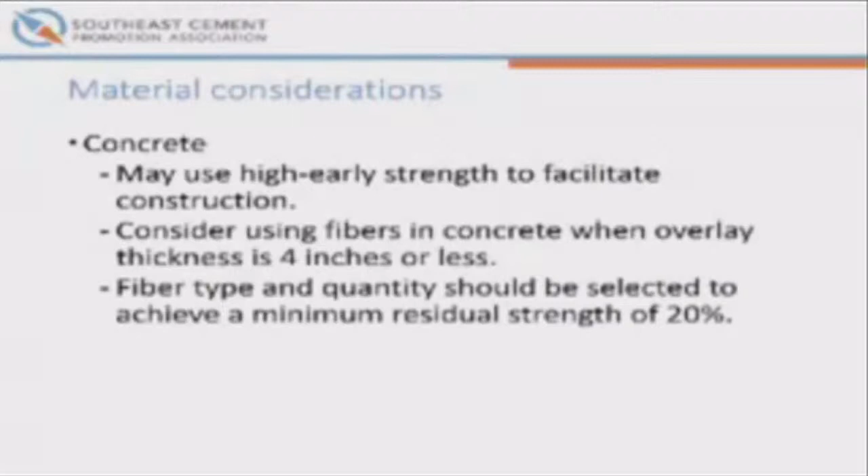Okay, what about material considerations? What do we need to think about here? Well, the type of concrete used fairly often in these is a high early strength concrete, because this allows you to open it back up to traffic a little bit sooner. You also need to consider using fibers in the concrete when the overlay thickness is 4 inches or less. These fibers will help hold the panels together better than not using fibers. The fiber type and quantity should be selected so that you have a minimum residual strength of 20%.

Now, some other construction considerations. The milled surface is a good surface to bond to, especially if you're doing thinner overlays, 4 inches or less.

Surface planing is not a good idea. Even if you're going to overlay on top of existing asphalt and not remove any, it's still a good idea to run a milling machine over it to roughen it up so you have a better bond between the two layers.

The milling depth should remove all surface distortions greater than 2 inches deep. You want to match your curb or adjacent structure elevations, not just for ride but also for ADA accessibility. You've got to take care of changes in cross slope, but be careful not to mill too much - that's a fatal mistake. It can cause issues. We've had those problems in South Carolina.

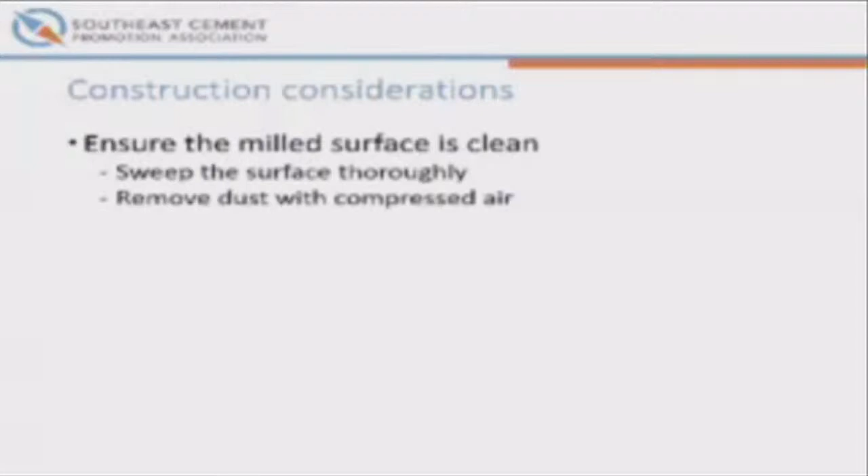Other construction considerations: after milling, your surface must be clean, because you can't bond to a dirty surface. It has to be swept thoroughly, all the dust removed with compressed air, and the surface needs to be damp before the concrete is placed. Not wet, no standing water, but mist it with water. That will reduce your surface temperature and also reduce the moisture absorption from the concrete.

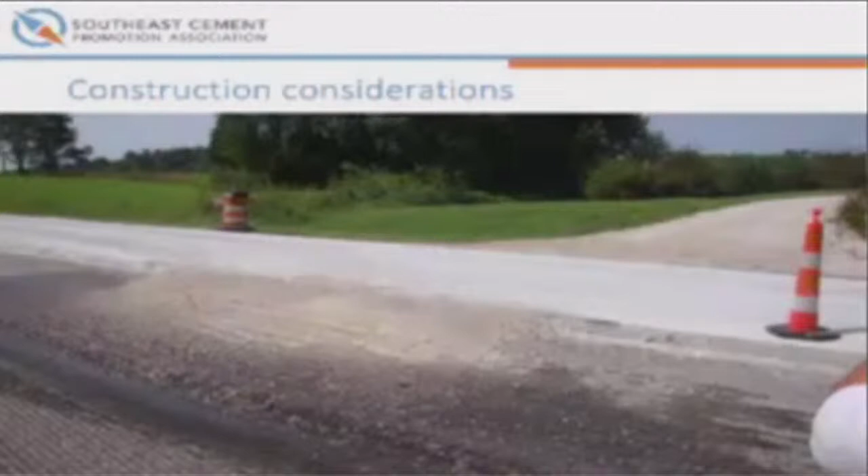If you have driveways or roadways that intersect your project, you can build small ramps out of millings, or leave a section out to come back and do during an overnight closure. This appears to be an entrance into a business, so you could work with the business to do that section while it was closed, so you wouldn't interrupt their workers coming to and from.

Okay, some examples. This is one we did in South Carolina. We started the planning in 2004 and did the construction in 2005.

Conway is just northwest of Myrtle Beach, and the two main routes to get to Myrtle Beach from the middle of the state, and even from people coming from far away, are either 378 or US 501. This was the intersection of US 501 and 378, so it got lots and lots of traffic. Even for trucks, this was the way they got into and out of the Myrtle Beach area. So you can imagine it's very, very busy.

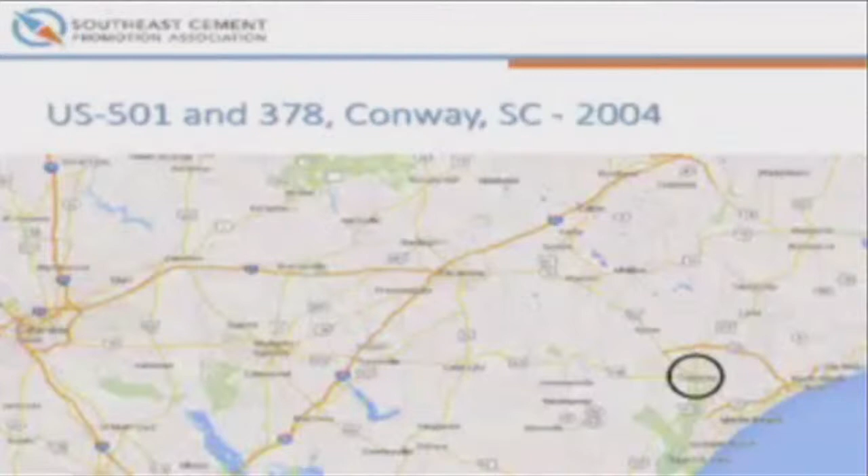The district had contacted us in the pavement design office because they had extremely severe rutting. They had about 15 inches of asphalt pavement, so it theoretically should have been fairly stable. But they were having to go out there every 3 or 4 years and mill off asphalt and replace it with more asphalt. They had tried several different times.

When we did the coring to locate the layer that was rutting, to make sure it wasn't rutting in the subgrade especially, it revealed there was a sand asphalt layer about 10 inches down that was the source of the instability. Our experience with sand asphalt is that sometimes it's very stable and other times it is not stable at all. This was one that, as you can see, was 10 inches into the 15, and it was very unstable, so it had to come out.

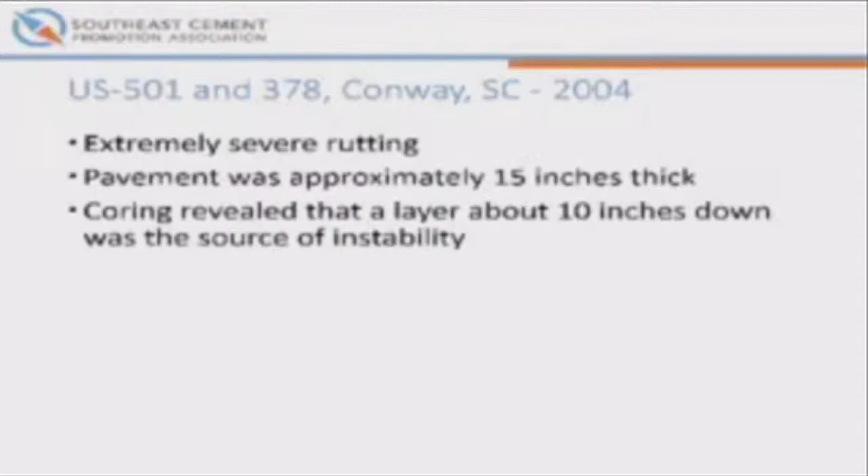So we started thinking about what we could do. We decided to mill 10 to 14 inches because we had to get that much out to restore the cross slope. It was so bad that people turning left into a fast food restaurant were high centering their cars on the humps.

Something had to be done. So we decided to mill that out and make sure we were 10 inches deep at the curb, then put a 10-inch thick overlay of plain jointed concrete pavement with 1.5-inch dowels and 15-foot joint spacings. This is a typical pavement arrangement for us.

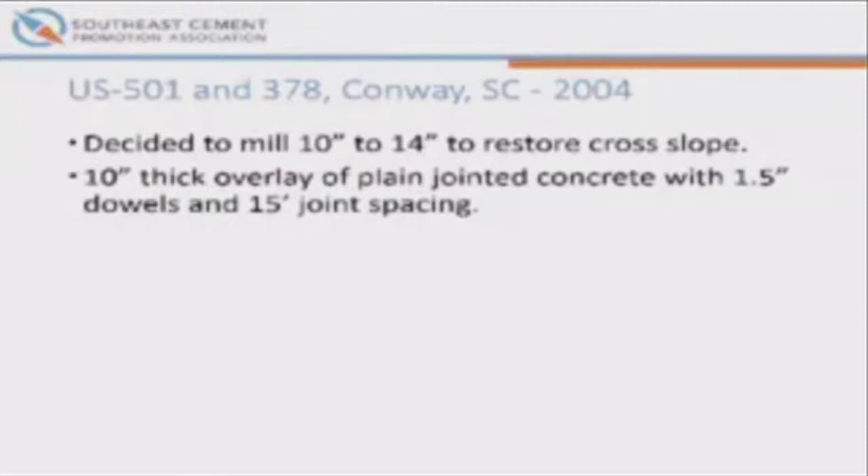The resident construction engineer and his assistant spent a lot of time going around to the businesses, talking to them about what was coming, and contacting residences about the detours. We tightened down pretty hard on this - we gave them 2 weeks to do the concrete paving. They did it in February, the lowest traffic season. They had to maintain traffic in one direction, with a 24-hour closure allowed from Sunday at 8 p.m. to Friday at 6 a.m. Anytime in there they could be closed for 24 hours at a time, but then they couldn't be closed on the weekends. It was tight.

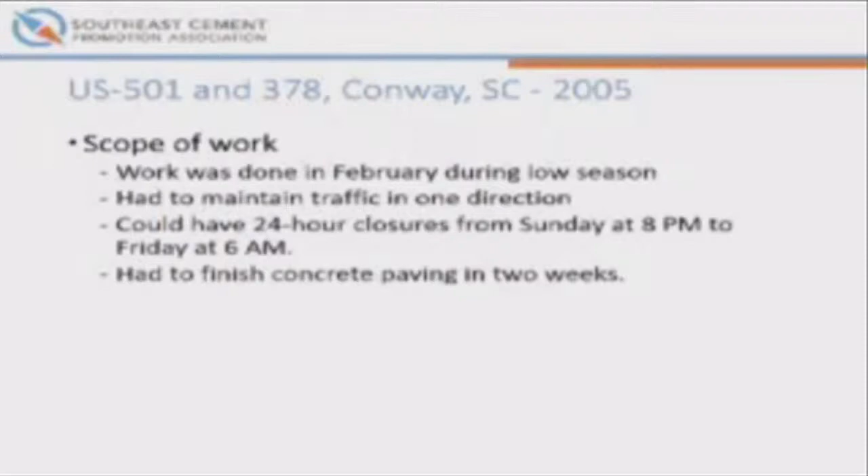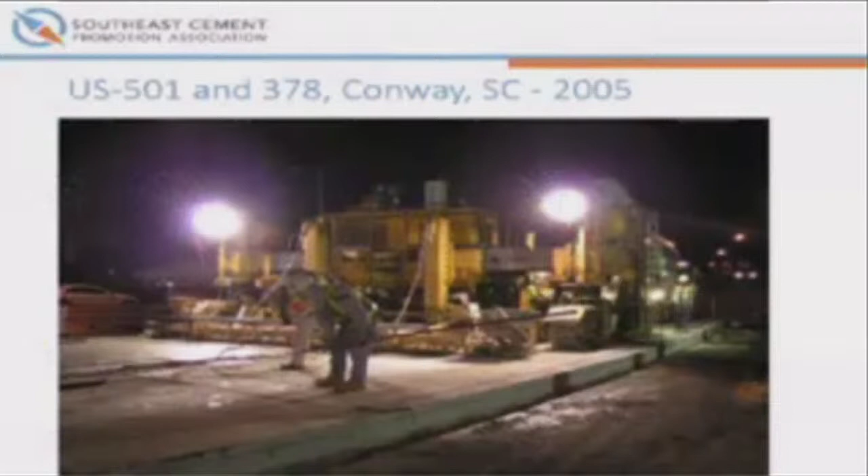This is another project we did in Laurens County. It was a 14-mile section of I-385. It had been built as a U.S. highway, and we needed to upgrade it to interstate standards. So we did a huge project here - an unbonded overlay where we milled 6 inches of the existing asphalt, maybe more or less in some places depending on the horizontal and vertical curves, especially under the bridges. We replaced it with 10 inches of jointed plain Portland cement concrete, and then did RCC, roller compacted concrete, on the shoulders.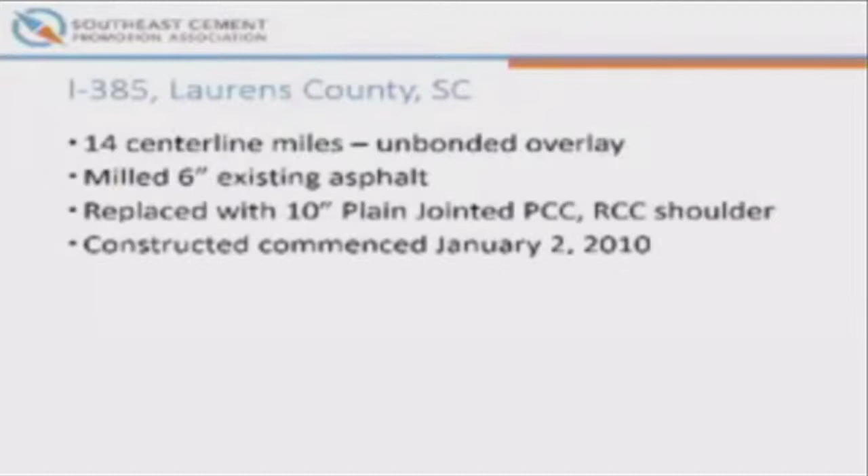We started on January 2nd of 2010, and did the ribbon cutting on July 23rd, 2010. We had one direction of the interstate closed for the entire length of the project, and had to detour anybody trying to go north. But it really went extremely smooth, even though we had a lot of bad weather that winter. It was a really good project.

And this one has served us well. This is a Google map photo, so it's not real, but it has really been a good project.

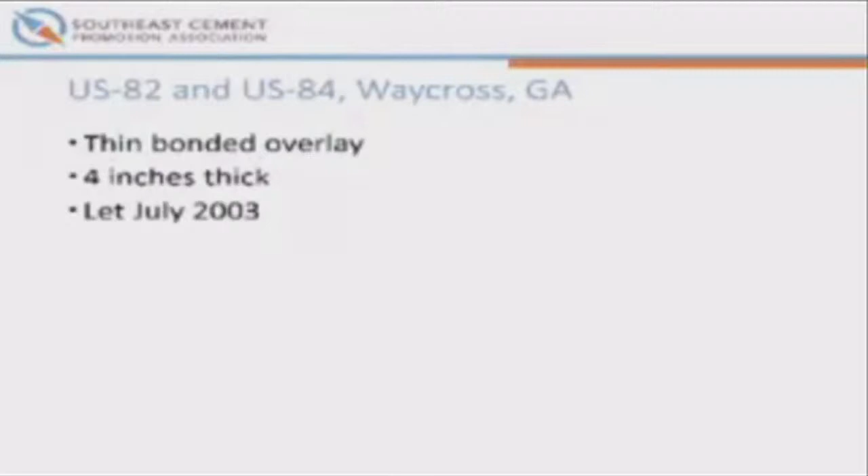We've got a good many intersections around Georgia. This one is in Waycross, Georgia - District 5, which is kind of below Savannah, along the coast, and some inland. There are lots of intersections that were placed because they had such bad rutting and shoving. Some have had a little cracking in some panels, but they're still serviceable. This one, it was wet that day, but it's had traffic signal loops cut into it and it's still working.

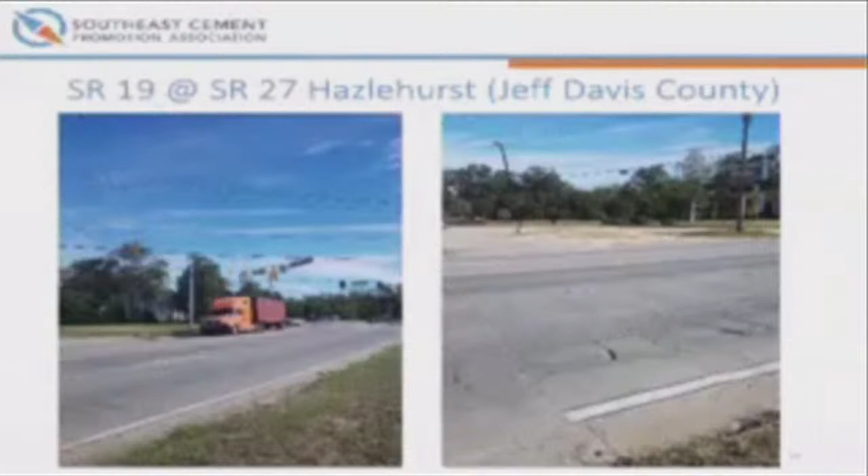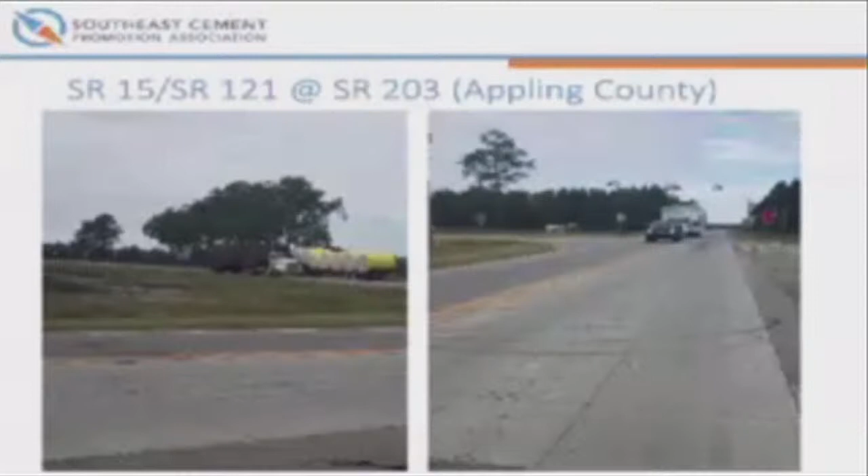Georgia grows lots of cotton, lots of peanuts, lots of peaches. Timber farming is huge. Soybeans. They're the blueberry capital of the United States. There's lots of products that are produced here.

I was at this intersection, out in the middle of nowhere. There's not even a store on any of these corners. In this picture on the right, there's a parking lot and an old store, but I think it's being used as a residence now.

While I was there, probably 4 or 5 to 10 minutes, I saw 2 fully loaded cotton trucks, 2 fully loaded peanut trucks, and half of a manufactured home, a mobile modular home, being towed through this intersection. So this intersection gets a lot of traffic, and this was a really good choice for them because now they don't have to worry about the pavement failing on them all the time. It really is a benefit to the entire community.

For detailed information, the CP Tech Center, the National Concrete Pavement Technology Center, has a publication that outlines how to use concrete overlays. This is a big topic nationwide. People are using overlays more and more, and we are more than glad to help. This publication is available online, but we can also provide a hard copy if you contact us. We're also available to assist for anything you need as you start thinking about doing overlays. We'll visit the site, help with design, whatever needs to be done.

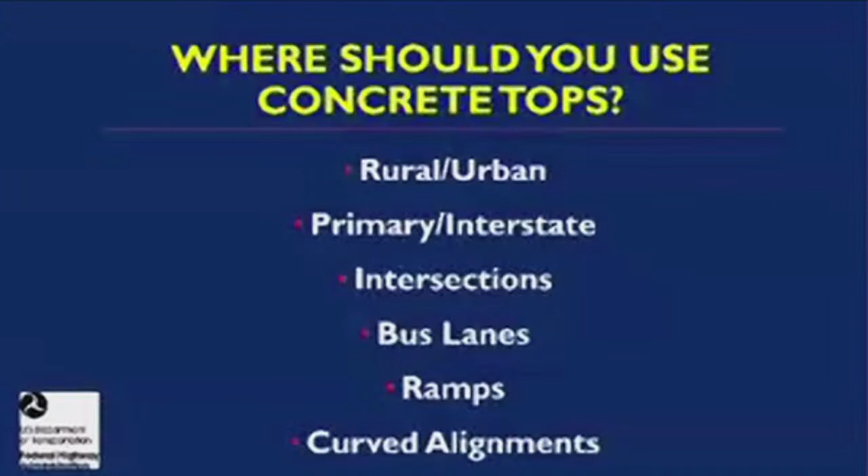Of the 7 technical areas to be included in the Every Day Counts program for 2021 through 2023, this slide indicates where you can use concrete overlays, and basically they can be used anywhere, in every kind of situation, and done in an effective, cost-effective, and sustainable manner. Here is a list of readily available documents and website sources for planning and executing a concrete overlay project, though there are many more references available as well.

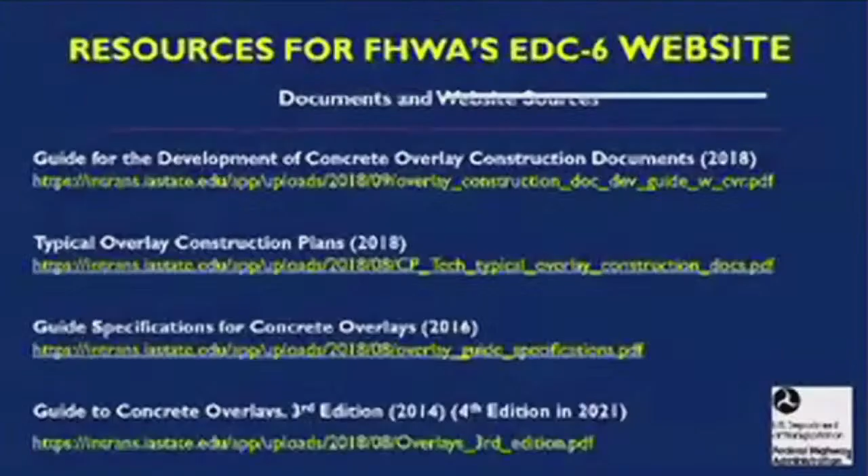One very important part of planning any overlay project is the maintenance of traffic. During the Every Day Counts program, FHWA is offering the states financial incentives to participate in the use of these technologies.

Basically, concrete overlays come in a variety of configurations, which include bonded and unbonded concrete over asphalt, bonded and unbonded concrete over composite pavements, and bonded and unbonded concrete over concrete pavements.

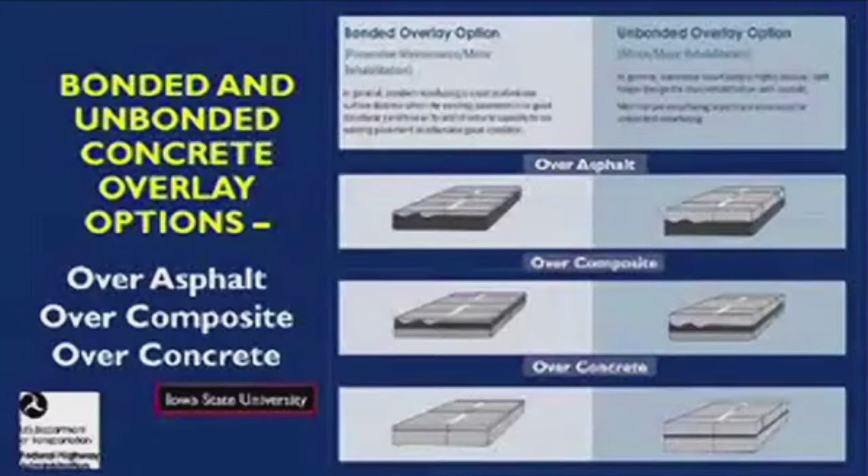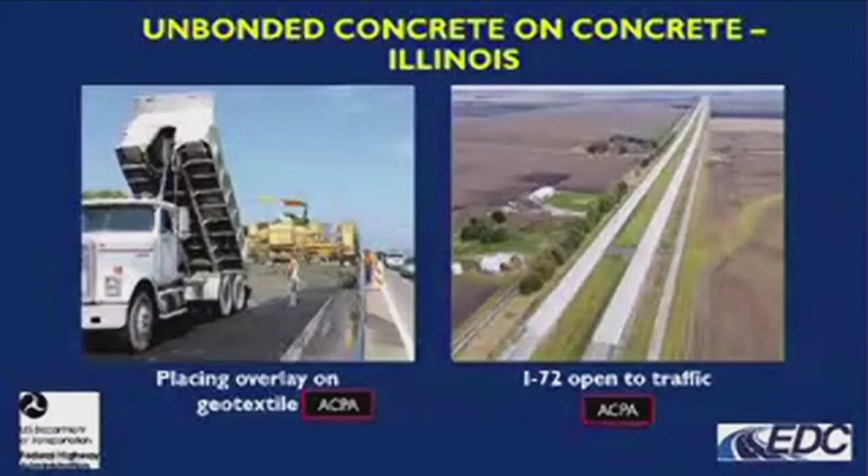Here is an example of a bonded concrete on composite pavement in Iowa. It's being done one lane and a shoulder at a time, and you'll notice that maintenance of traffic is an important part of this project. You can see the traffic being led slowly in the opposite lane for safety purposes, obviously, and the completed pavement is open to traffic in the photo on the right.